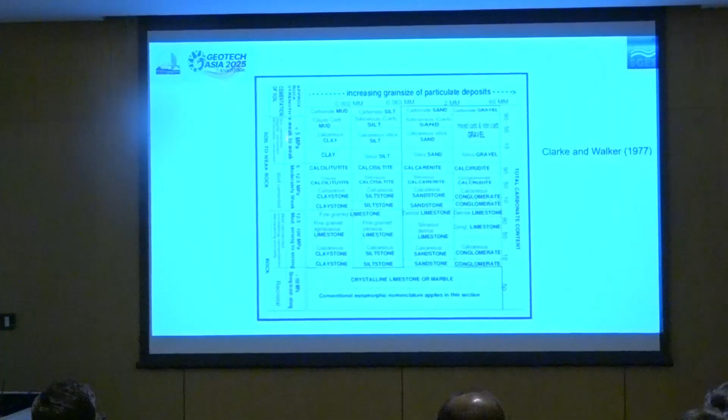The framework for classifying carbonate soils is Clarke and Walker, a Geotechnique publication. You could see the cemented material, uncemented material, and cementation. I draw your attention to this to classify carbonate sand. A carbonate content more than 90% is treated as carbonate sand, and less than 10% is treated as silica, and anything in between is calcareous, and you'll have to do an interpretation of the parameters.

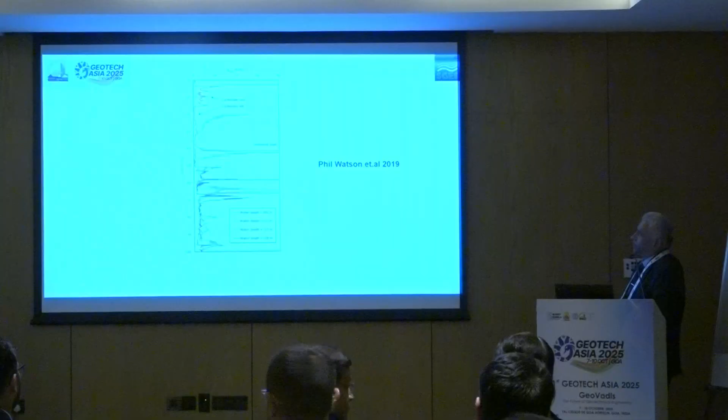So I pulled this from Phil Watson, who is the chair of TC209 offshore. He presented in one of his papers, and look at the CPT data. You have the refusal cone resistance, and you have the carbonate sand and carbonate silt, cemented layers, and with different water depths in the same region, the data appears not to superimpose on each other, which tells us about the heterogeneity of the material itself.

So Argema-Clarom, the Clarom publications, brought out some guidelines on how to characterize the carbonate materials. Before I talk about it, it reminds me to recall the literature where the problem existed in the early 80s on the North Rankin A platform in Australia. The Woodside engineers were monitoring the driving of piles, 2 meter diameter, 125 meters below the seabed. They found that the driving resistance was very low and the unit skin friction was not going to be achieved for the intended capacity.

So then they commissioned a research group under the guidance of engineer Graham Prince, with a Commonwealth Scientific Industrial Research Program. They studied the micro behavior, mechanical behavior, and then formed the guidelines. There were several conferences, at least two, one in Australia in the late 80s and one in Bahrain in 1999. And then this industrial research program, Argema-Clarom, published guidelines on how to handle and characterize carbonate materials.

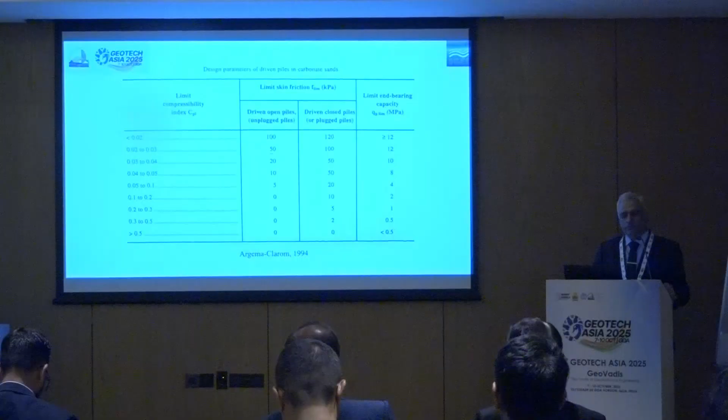This also leads to how to choose the limiting skin friction and the limiting end bearing, and you can see here 10 to 20 kilopascals and 2 to 4 megapascals on the skin friction and end bearing respectively. Here is the limit compressibility index, which is the slope of the tangent at 800 kilopascal. Some researchers, for example Professor Randolph, have said you could also use much higher pressures, not just 800, if there are any cemented materials.

This reminds me of a case study which shows a 20 kilopascal shear strength, from offshore west coast India. ONGC did this work, and the limiting end bearing is also 2 to 4 megapascals. It's a similar framework to the previous slides, it is derived, and the material characterized is sand.

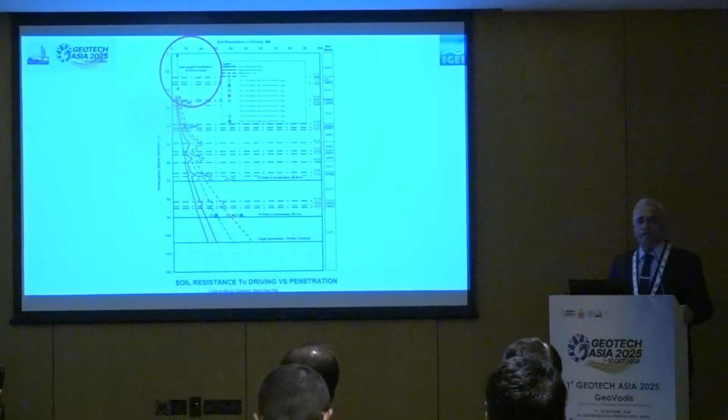With this low unit skin friction, you develop the capacities, and obviously it's very low capacity. You evaluate the initial self-weight penetration of the pile foundation. With no resistance, you'd expect about 15 to 20 meters of self-weight penetration, and then you develop the soil resistance to driving and blow counts in the wave equation program, choosing a 900 kilojoule hammer necessary to drive the piles to 90 meters deep.

However, the self-weight penetration was expected to be around 15 to 24 meters. The piling contractor was very careful, expecting very deep self-weight penetration, and wanted to put some pile stoppers or retainers so they don't sacrifice the piles in case of uncertainty and piles being lost. But when actual driving began, the pile did not experience any settlement.

It was only about 1 meter of penetration. You have a high blow count at the surface, and this actually panicked everybody offshore because it's very expensive. The barge time is consuming, and they didn't know what to do.

So what happened here, when the pile did not experience settlement, there was 15 meters of pile length sticking up. When you put the hammer, even with the maximum boom, you were not able to place the hammer on top of the pile. So they were not able to drive unless they put a small hammer. One of the piles, they had to chop it, drive it, and then weld it again.

It consumed barge time. So we went back and looked at this, connecting the 20 kilopascal with the cemented nature of the carbonate content, resulting in only 1 meter of self-weight penetration. When you look at the CPT, it gives 35 megapascal of cone resistance, a refusal stratum. Apparently, when you don't use proper tools and rigs, you're not able to quantify what the material really is.

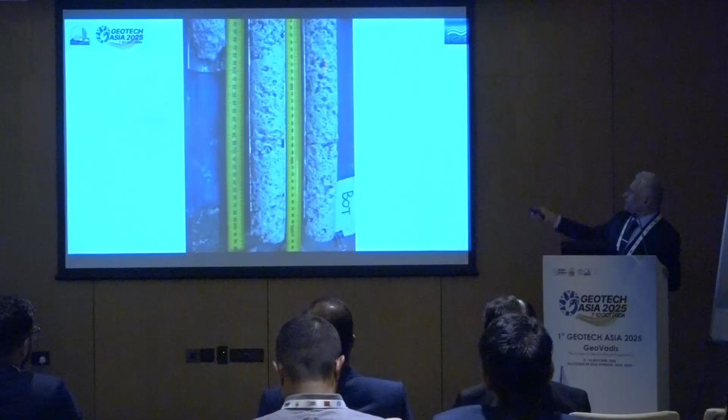It is housed in the magazine, and after certain progress, they bring the tool out on the deck and recover the samples, and then characterize those materials. Because of the topic, I pulled out these old photos from those days, and you see the uncemented material here, and also the cemented materials that you encounter in the borehole. These kinds of materials are so fragile that if you don't use triple tube core barrels, you will not be able to get these kind of core samples. We face the same problem in our onshore geotechnical investigation in characterizing the overburden and the material between overburden and the bedrock. So one of the ways to characterize this carbonate material.

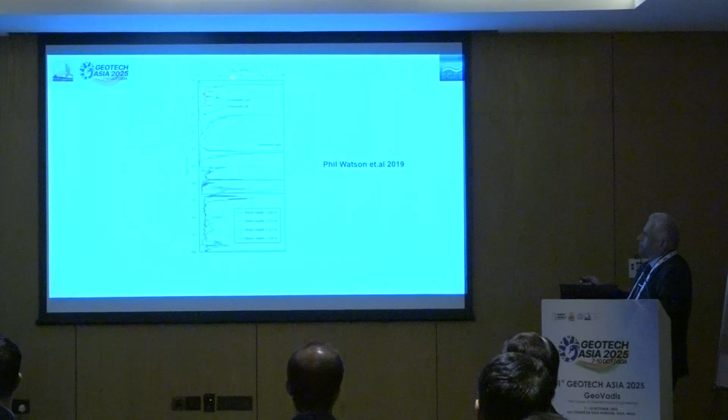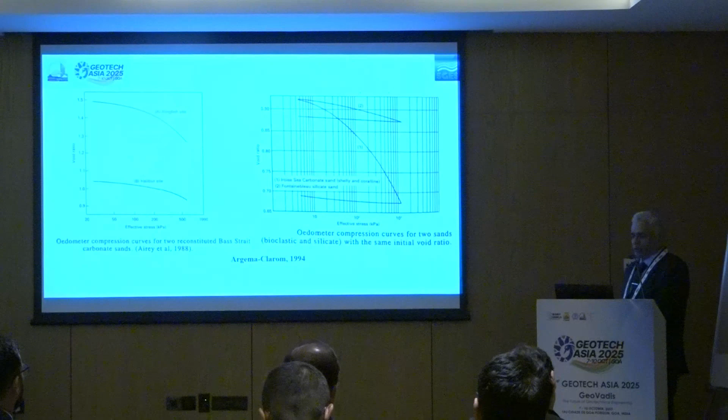I pulled this out from Phil Watson, who is the chair of TC209 offshore. He presented in one of his papers, look at the CPT data. You have refusal to cone resistance, and you have carbonate sand and carbonate silt, cemented layers, and with different water depths in the same region, the data appears not to superimpose on each other, which tells us about the heterogeneity of the material itself. Since this undergoes large compression, you see the volume change for this bioclastic or biogenic material. High void ratio changes, where at similar relative density, the silicate materials don't undergo much compression.

Argema-Clarom, the Clarom publications, brought out some guidelines on how to characterize carbonate materials. Before I talk about it, this reminds me of the literature where the problem existed in the early 80s on the North Rankin A platform in Australia.

The Woodside engineers were monitoring the driving of piles, 2 meter diameter, 125 meters below the seabed. They found that the driving resistance was very low, and the unit skin friction was not going to be achieved for the intended capacity. So they commissioned a research group under engineer Graham Prince with the Commonwealth Scientific Industrial Research Program, who studied the micro and mechanical behavior and formed the guidelines.

There are several conferences, at least two: one in Australia in the late 80s and one in Bahrain in 1999. This industrial research program, Argema-Clarom, has published guidelines on how to handle and characterize carbonates. One such characterization requirement is to perform a compression test, the oedometer test.

Either you can do an isotropic compression in triaxial or perform an oedometer test and develop this tangent. The slope of this at 800 kilopascal is defined as the limit compressibility index. Some researchers have also shown the secant compressibility index, but the tangent limit compressibility index at 800 kilopascal is very well received in the industry and still is being practiced.

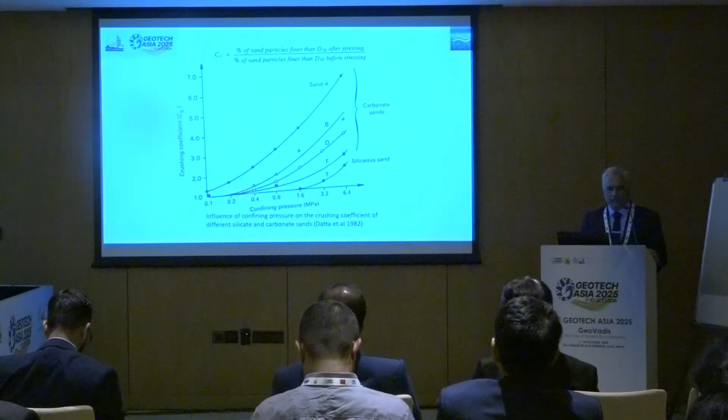Some researchers have also shown the crushing coefficient. If you perform a grain size distribution before and after the test, you see no change in silicate material, but you see particle crushing in the carbonate phenomenon, and this crushability index is defined here. If you encounter a crushing coefficient, that means the materials are becoming finer, and you'll have to be careful in using them for design.

This also led to how to choose the limiting skin friction and limiting end bearing: 10 to 20 kilopascals and 2 to 4 megapascals for skin friction and end bearing respectively. Here is the limit compressibility index, the slope of the tangent at 800 kilopascal. Some researchers, for example Professor Randolph, have said you could use much higher pressures than 800 if there are cemented materials.

This reminds me of a case study showing 20 kilopascal shear strength, from offshore west coast India. ONGC did this work, and the limiting end bearing is also 2 to 4 megapascals. It's a similar framework to the previous slides, and the material characterized is sand.

With these low unit skin frictions, you develop the capacities, which are obviously very low. You tend to evaluate the initial self-weight penetration of the pile foundation. With no resistance, you'd expect about 15 to 20 meters of self-weight penetration.

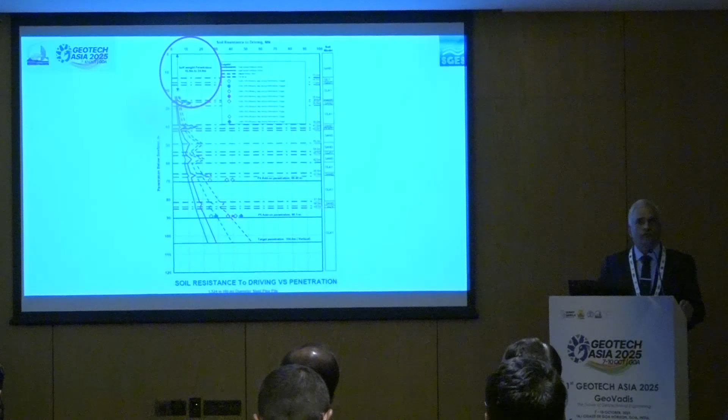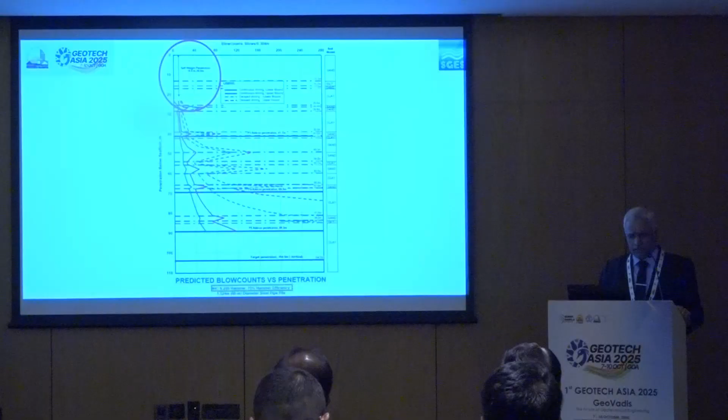You then develop the soil resistance to driving and the blow counts in the wave equation program, choosing a 900 kilojoule hammer to drive the piles to 90 meters deep. However, the self-weight penetration is expected to be around 15 to 24 meters. With this, the piling contractor was very careful, expecting deep self-weight penetration, and wanted to put pile stoppers or retainers so they wouldn't sacrifice the piles in case the uncertainty led to piles being lost.

But when actual driving began, the pile did not experience any settlement — only about 1 meter. You have a high blow count at the surface, and this panicked everybody offshore because it's very expensive, the barge time is consuming, and they didn't know what to do. So what happened here when the pile did not experience settlement?

There was 15 meters of pile length sticking up. When you put the hammer on, even with the maximum boom, you are not able to place the hammer on top of the pile. So they were not able to drive unless they used a small hammer. One of the piles they had to chop, drive, and then weld back together.

It consumed barge time. So we went back and looked — I'm connecting this 20 kilopascal with the cemented nature of the carbonate content, resulting in only 1 meter of self-weight penetration. When you look at the CPT, it gives 35 megapascals of cone resistance, a refusal stratum.

Apparently, when you don't use proper tools and rigs, you are not able to quantify what the material is. In this case, there was no drilling or triple tube core barrel used, and therefore they characterized the material as sand. A conservative estimate for pile capacity is fine, but that doesn't suit the drivability and initial self-weight penetration assessment. This is simple, but it's one of the very important lessons we learned in the offshore project.

I had an opportunity and was honored to work on a project about 20 years back in Australia, using the portable remote operated drill operated by Benthic Geotech in Australia. It has 2 magazines where all the drill rods, the CPT cones, and the core barrels are housed. The entire unit is placed on the seabed, and the driller operates it by computer, collecting samples, pushing the CPT cones, collecting core samples using triple tube, but you cannot take out the material. It is housed in the magazine, and after certain progress, they bring the tool out on the deck and recover the samples, then characterize those materials.

Because of the topic, I pulled out these old photos from those days, and you see the uncemented material here, and also the cemented materials that you encounter in the borehole. For these kinds of materials, which are so fragile, if you don't use triple tube core barrels, you will not be able to get these kinds of core samples.

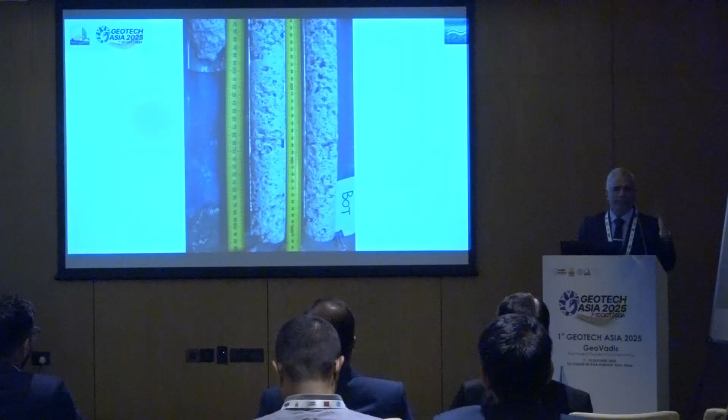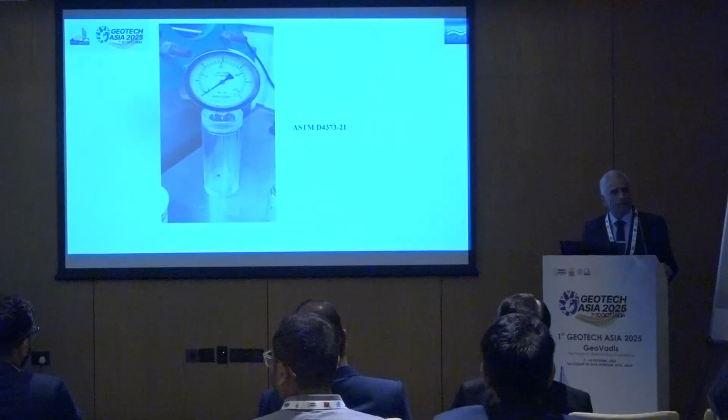We face the same problem in our onshore geotechnical investigation in characterizing the overburden and the material between overburden and the bedrock. So one of the ways to characterize these carbonate materials is to qualitatively test with 1 normal hydrochloric acid, whether it reacts extremely high, moderate, or not at all. The moment you see some reaction, you subject these materials to further carbonate content testing as per ASTM standards, and this carbonate content will dictate what kind of parameters to be chosen for your pile designs.

Again, I prepared this 20 years back in 2006, and you could see the cone resistance. You have a high CPT cone resistance, and it refused at 10 meters. These are all uncemented material in the top 10 meters, then suddenly you see a cemented material, well cemented.

This is for an anchor project, and you could see there's only 4 data sets. I put about 11 or 12 in that region, circular locations. None of them superimpose on each other, clearly showing the heterogeneity of these carbonate materials vertically as well as laterally.

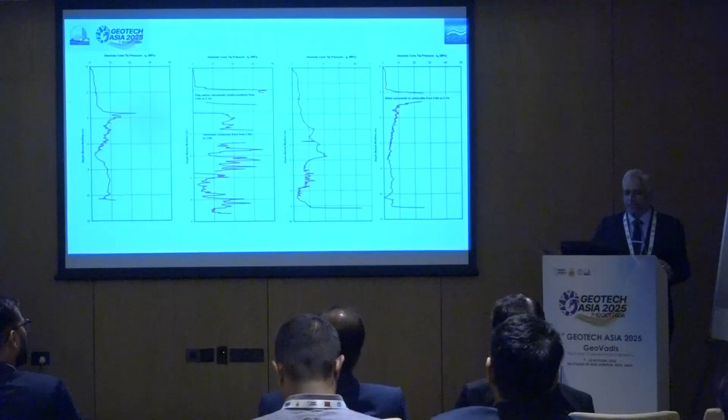You see the uncemented material and the cemented material. The strength at 10 meters was about 14 megapascals, while at 15 meters it was only around 2 megapascals of unconfined compressive strength. So the particle

curve itself is moving towards becoming finer. This is one of the important characterizations we have to do, the grain size distribution before testing and after testing, be it a direct shear test, a consolidation test, an oedometer test, or so on.

I just illustrate quickly two case studies, one on the cemented layer, the other one on the uncemented materials. How do we handle the carbonate nature?

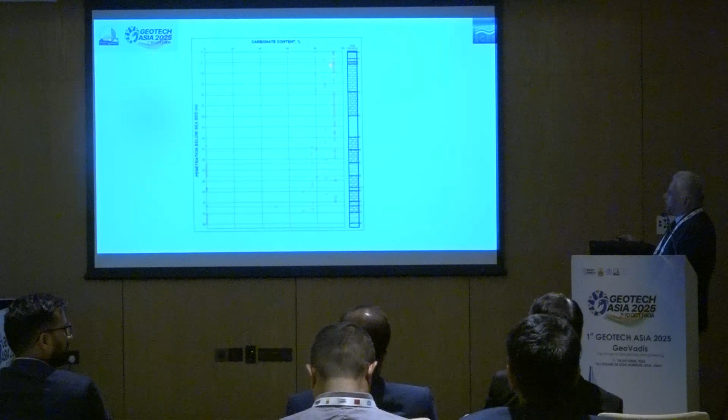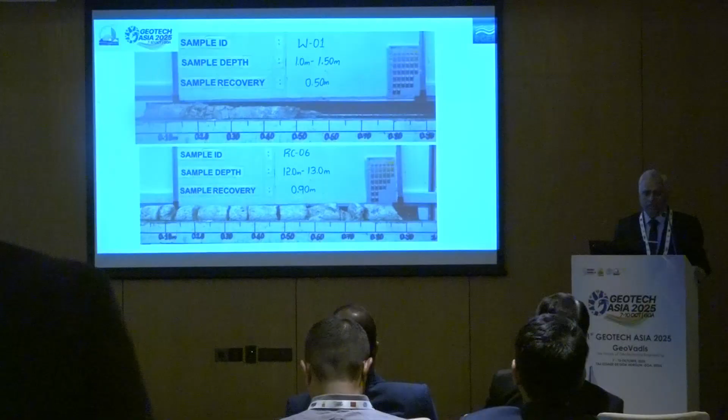In this case, it's very prominent in offshore Abu Dhabi. You can see the carbonate content is in excess of about 90%, and the material, I could see from the legend, is predominantly cemented. Only at the surface is there uncemented material, while at deeper depths predominantly you have cemented layers. The unconfined compressive strength varied between 1 to 4 megapascals.

So with this kind of predominantly cemented layer, driven piles are not conducive, so you have to resort to drilled and grouted piles. What is normally done is they drive a casing until reaching a competent material, so that during drilling there is no borehole collapse. Once you drive that, you make a hole, then insert the pipe and grout it.

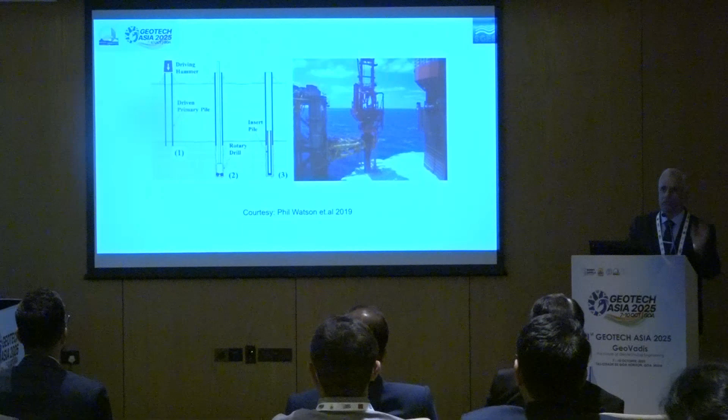So the capacity is dictated by the interface between the pile, the grout, and the rock. These piles will have shear keys at a certain spacing and thickness, and therefore the capacity is dictated by the unit skin friction based on the unconfined compressive strength, and also the pile-to-grout interface. You have the grout strength, generally about 35 megapascals, used in this region. Then you estimate the ground model from these previous slides, estimate of friction, and then the capacities.

Okay, so you have to drill this. Usually in this drilled and grouted pile, you will not consider the end bearing component, only the friction component. So what if you don't have a cemented layer?

Again, in Saudi Arabia, you can see the carbonate content in excess of 80%. At certain depths, it's between 60 to 70%. So anything more than 80%, you treat this as a carbonate soil. Less than 20%, you treat as a silicate material.

Anything between 20 to 80%, you just have to do some interpretation. So here they do a logarithmic interpolation to get this unit skin friction and end bearing. Wherever it's more than 80%, you limit the skin friction to 20 kilopascal and 3 megapascal on the end bearing, and otherwise you interpret between 20 to 80%. So you develop this capacity, and I want to illustrate here.

If you don't consider the carbonate content, you are actually over-predicting the pile capacity. If you consider the carbonate content, you will have the realistic value. And we have seen losing pile and losing hammer and so on and so forth.

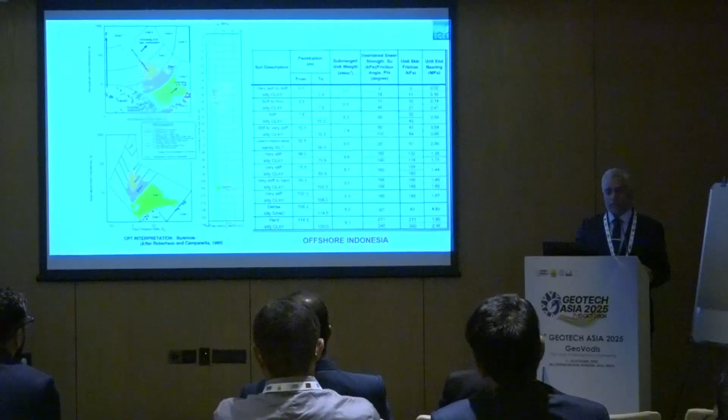With these two illustrations, I want to highlight that in the regions I have worked, you could see a normally consolidated profile with all cohesive soils. In the east coast of India it's an under-consolidated material with OCR less than 0.5. If you go to the Middle East, the minimum shear strength is around 300 kilopascal. Sometimes you get cemented layers; non-carbonate we term as gypsum, and in the carbonate region it's calcarenite, calcilutite, etc. as per the Clarke and Walker table.

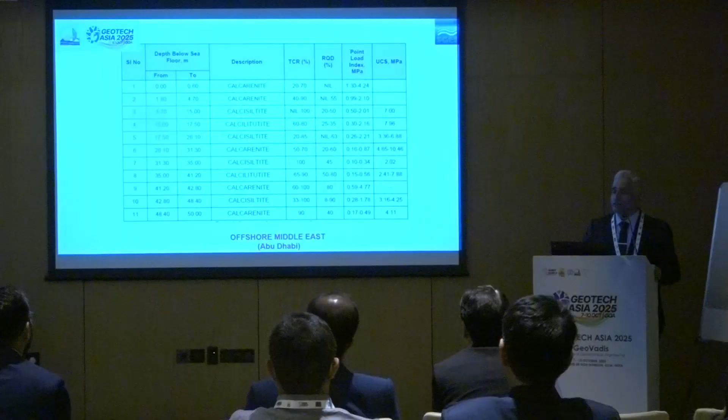So in order to bring a different perspective on stratigraphy and the response of these materials, and the risk that this stratigraphy offers to the installation of offshore oil and gas structures, I have written this book, compiling my experience and the company's experience across all these 5 geographies. It was inaugurated a couple of months back, and I'm happy to share that this book is now published and available across the world on Amazon.

I'm equally delighted that I was able to present this book to my research supervisor, Professor K.S. Subbarao. With this, I conclude. Thank you, Chairman, for this. I acknowledge all these people, and thank all of you for your patient listening. Thank you.

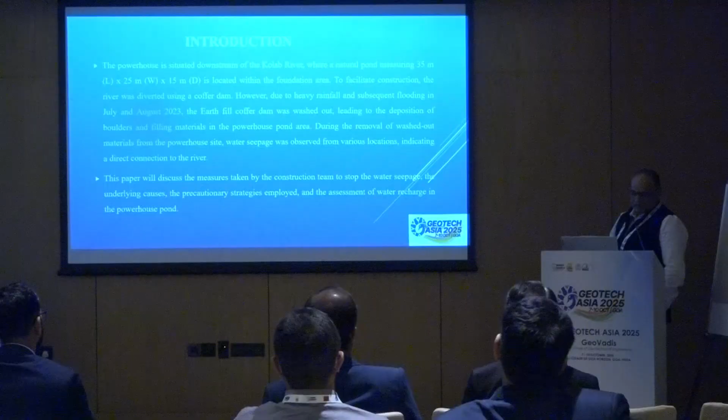In the powerhouse area, the consultant selected the site because it was a deep gorge, meaning the river was already taking a turn at that point, and had naturally formed one big pond that is 35 meters long, 25 meters wide, and 15 meters deep.

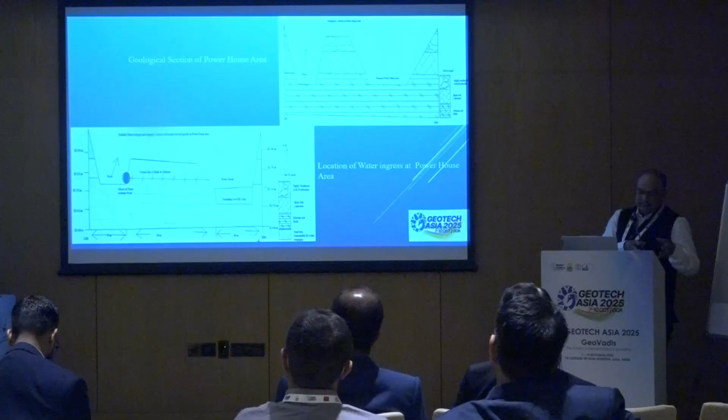We took some measuring data by putting chemicals and color in the river body, and determined where the water is coming from at the powerhouse area.

Before starting the grouting work, the cement grouting work, we observed the Lugeon value which was very high, about 175. Based on technical suggestions, we started the grouting, but it was very difficult to control the water because water seepage was about 20,000 liters per hour.

Initially we were unable to put even one bag of cement at 5 to 6 bar pressure itself. Then we increased the pressure and increased the hardness also.

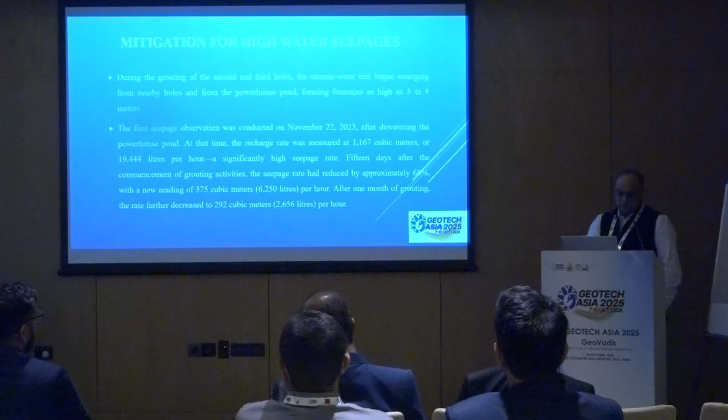Finally we controlled the water seepage down to about 2,000 liters per hour. But this work went on for about 7 to 8 months to control this water seepage.

We controlled the water seepage, but at the downstream area there was filled-up material, and the client was in a hurry to start the construction work, so his consultant suggested doing sheet piling in that area.

The client deputed another contractor, and they did the sheet piling. Due to the sheet piling, high vibration, and related factors, all the grouting work was damaged, and because of this, the client again shifted the powerhouse location to the downstream area.

This was the conclusion, sir.

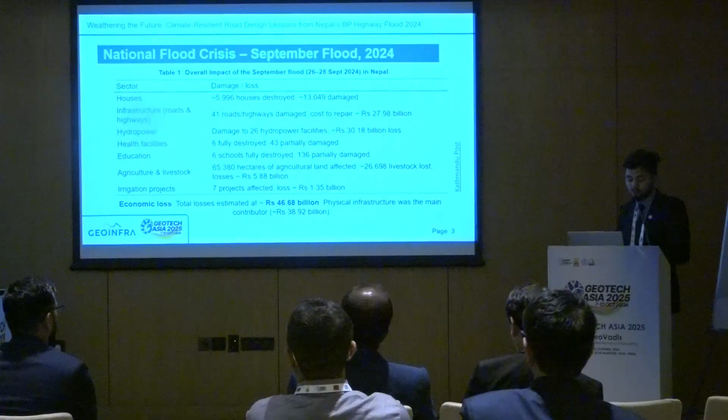This is a strategic link between Kathmandu Valley, the capital city of Nepal, and the eastern Tarai region of the country, spanning 160 kilometers. It traverses fragile schistose and phyllitic formations with around 114 bridges.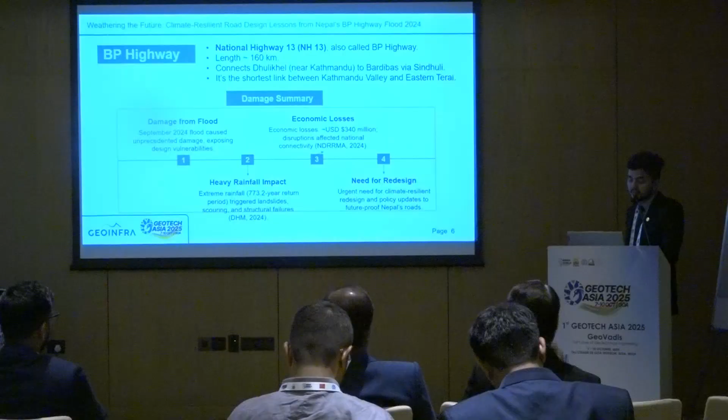During the 2024 event, extreme rainfall caused landslides, abutment scouring, and roadway collapse. This is the summary; I will go deeper.

This was the methodology: we did a reconnaissance survey, some drone photographic surveys, and hydrological and meteorological analysis. After that, we dug up the probable causes and the impacts of the damage.

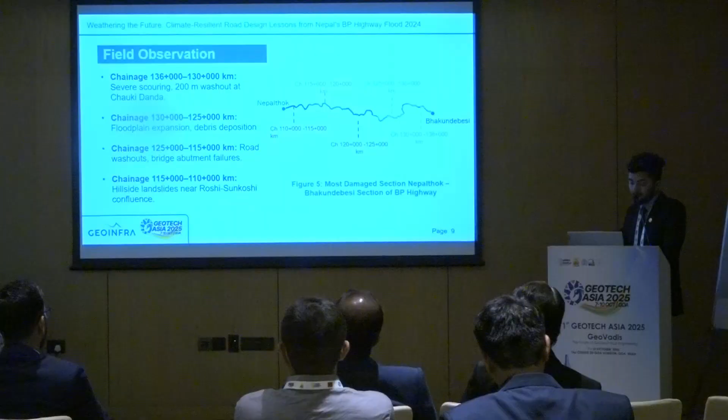So this is the study area map. You can see the most affected section of the highway, a 26-kilometer study segment. I have shown some of the chainages where most of the damage occurred. Between kilometers 136 to 130, there was severe scouring with a 200-meter washout near Chauki Danda, and some debris deposition areas, floodplain aggradation, breaches and road washouts like that.

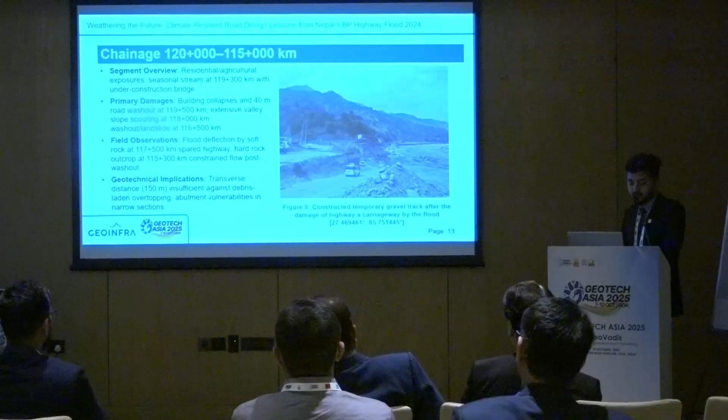This is another section with damages. I don't want to go deep here. So talking about the event, we did some hydroclimatic analysis.

Using Thiessen polygon interpolation, we quantified the spatial heterogeneity and performed a Gumbel EV1 analysis, which yielded a 773-year return period for this rainfall magnitude.

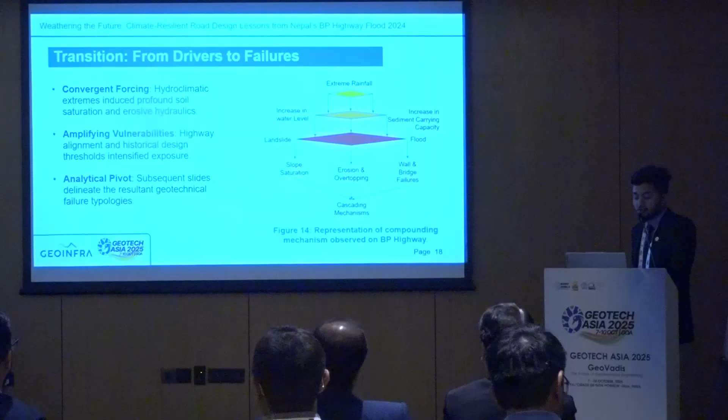This hydroclimatic geomorphic process interacted in sequence. Extreme rainfall saturated slopes, triggering landslides, entrained debris, enhanced scour and overtopping, which in turn undermined structural elements.

Damage type one was slope saturation and landslides that happened in most sections. Another was erosion and overtopping phenomena, as you can see in the pictures. Another was wall and bridge failures on the highway section. And there were cascading mechanisms as well: landslides, river erosion, and induced washouts, like that.

This is the damage mapping of the whole section, where convex meanders with sinuosity indices greater than 1.2 correspond to high risk zones.

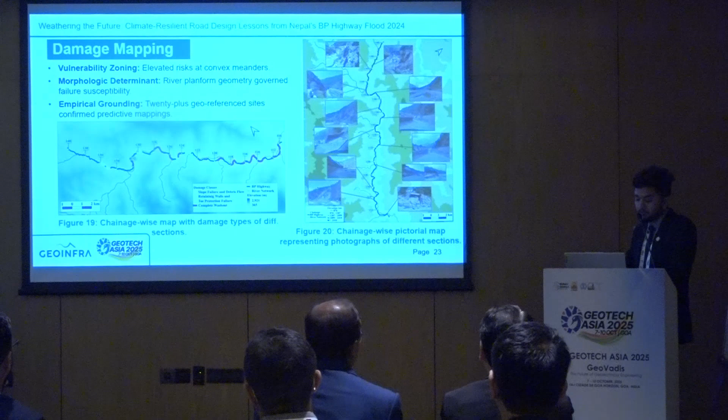Complete your presentation, time is over. I'm just concluding here, so translating findings into practice.

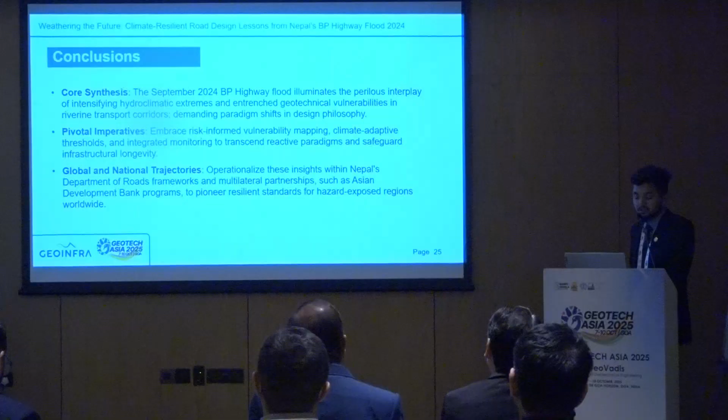And so the conclusion is like this: the BP Highway flood exemplifies the interplay of climate-driven hydrologic extremes with geotechnical fragility in Himalayan corridors. This demands a shift from deterministic to probabilistic design approaches for river corridor-based highways, embedding climatic projections, sediment dynamics, and geomorphic alignment optimization into road engineering.

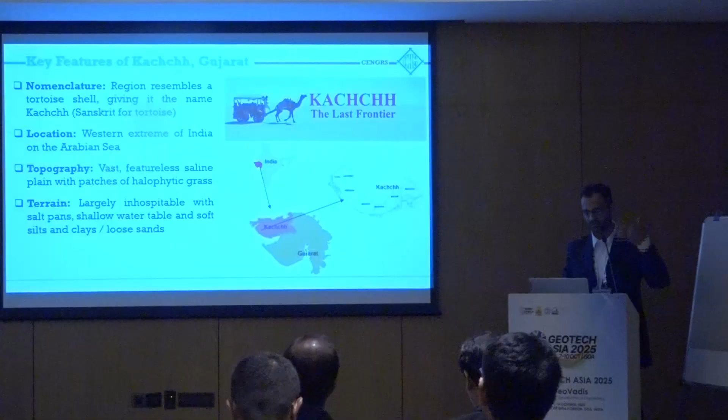It's actually no man's land. If you haven't been there, don't. There's nothing for miles across. If you just stand, you can see till the horizon. So it's a very tough site for us to work, to carry out investigations. This is beyond the BSF post, actually, near the border of Pakistan.

So this is a very simple presentation. We'll just share our experiences, or the results of the investigations we've carried out in this area. Again, since it's no man's land, there's very little past experience of investigating the strata here. So I think this project gave us an opportunity to really understand the geotechnical properties of the Kachchh area. So let's see what we did.

In the last 2 years, we've investigated more than 300 wind turbine generator, or WTG, foundation locations in this area. Usually these are quite far away from each other. At each WTG location, typically the customer-defined scope was to do one borehole, one cross-hole seismic test, and of course electrical resistivity test and field CBR. At a few locations, and very much on our insistence, we also carried out some CPTs.

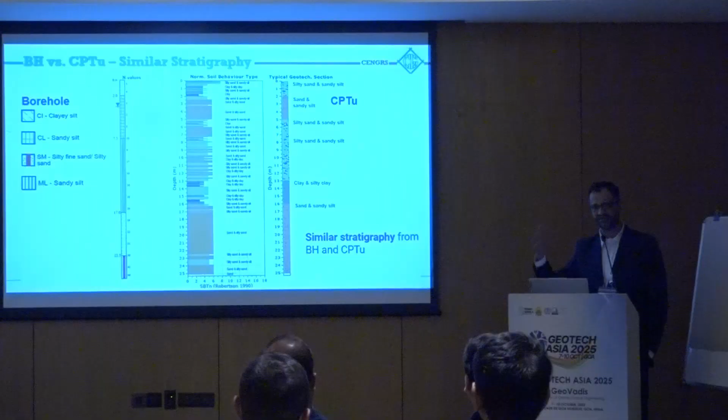So it's interesting, and I've picked one case study where we've carried out CPTs as well as boreholes, just to illustrate the findings. I was quite happy to find that the CPT-based soil behavior type actually matched what we get from boreholes quite well, even for these very typical kind of soil conditions. So the Robertson correlations were bang on, which is very encouraging.

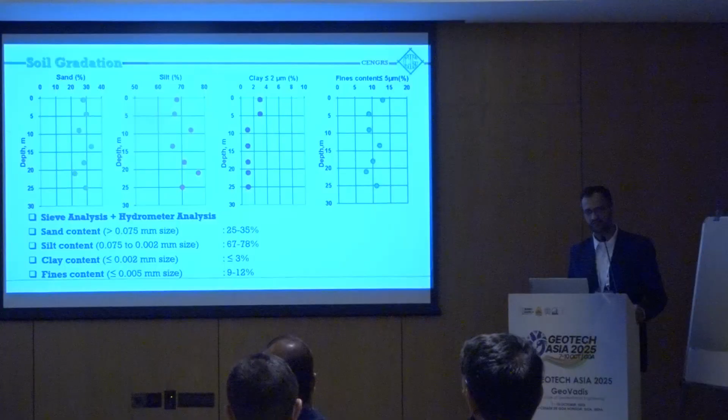This is what the stratigraphy basically is. It's 30-70, 30% sand, 70% silt. It's actually non-plastic silt. So that's what you get here. In terms of moisture content and liquid limit, the moisture content is almost close to the liquid limit. It makes it almost a perfect candidate for liquefaction, actually. It's highly liquefiable soils, as we will see.

The cross-hole seismic test results—and we've done so many of these. Again, we did 300 cross-holes, unfortunately without deviation survey. The customer did not take our opinion on this. But nevertheless, the cross-hole results show the shear wave velocities are extremely low, typically less than 200 meters per second, down to depth, and fairly consistent across the region as well.

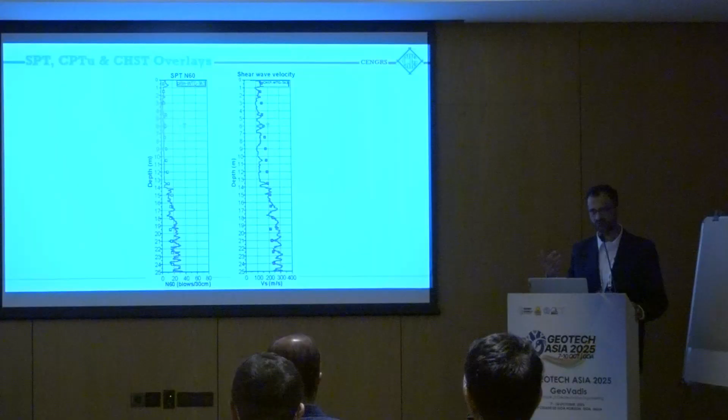The shear wave velocities also we compared. You know that the CPT values can be correlated to shear wave velocity, just like SPT. So we compared that correlation with the actual measured shear wave velocity profile from cross-hole, and we got a very good match. I was keen to do seismic CPTs, but the customer was not keen to pay us for it.

Which brings me to the next point, and this is not in the paper—I just wanted to discuss. We always believe that the key point in any investigation, any project, is not to copy-paste the investigation program, but to think about what are the geotechnical challenges and what's the best way forward, right? So unfortunately here the scope definition came in the form of a BOQ from the customer, and they were not open to change.

But really, this is what we pitched to them. We said, hey, this doesn't make sense in strata like this. In difficult terrain like this, it makes no sense to go and do so many boreholes, lab testing, and cross-hole testing. It's very painful, very time-consuming, very expensive. So we made a pitch that, for 263 WTG locations, rather than doing borehole-based investigations, we could have just as easily done CPT-based investigations. And we did the math, and we showed them that an investigation program of 191 days can be completed in 38 days, apple to apple, at a lower cost, and you get much more reliable data.

So if I was a decision maker, I would have jumped at this, but this didn't fly, right? But now we are doing another project, incidentally, in Kachchh, which is a complete CPT-based investigation program with seismic CPTs and CPT samples, and it's working quite well.

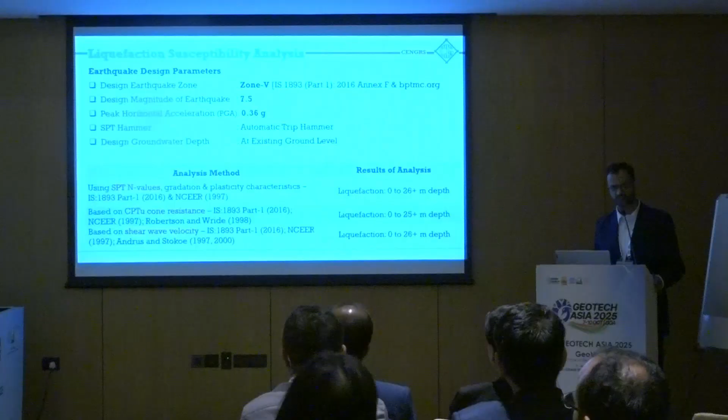I want to quickly touch on the liquefaction analysis. So we checked this out, and this is obviously zone 5, 7.5, 0.36 PGA area as per the Indian code. We ran the liquefaction analysis based on SPT, CPT, as well as shear wave velocity, just to see what we get.

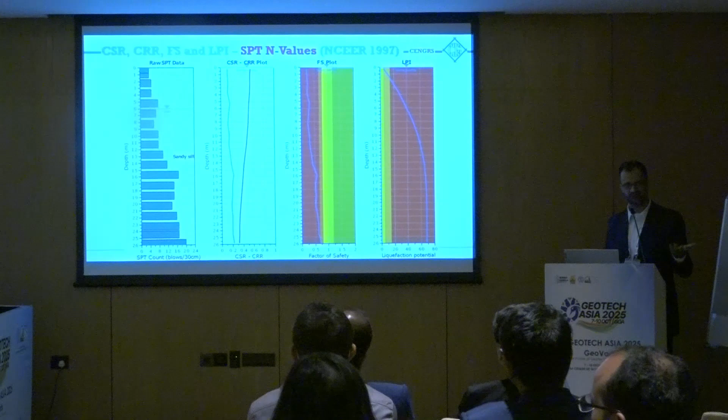So this is what we got from SPT. Pretty much everything down to 25 meters was investigated. Factor of safety was less than 1. Everything liquefied. We got the same story from shear wave velocity as well, and of course, the same story from CPT as well.

The fun part was putting it all together, right? I've been running these liquefaction analyses for a few years now, and to be honest, the CRR values never matched for me. I don't know what your experience is, but for me they usually haven't matched. Here, I was pleasantly surprised to find that the CRR profiles from all three approaches matched bang on. This is very surprising, but also very heartening.

It gave us a lot of confidence in all three approaches and in our final results as well. Of course, we converted this to LPI, and naturally the liquefaction potential index of these soils is extremely high. The liquefaction is not limited to 25 meters - it's likely going much deeper. We only investigated 25 meters, right?

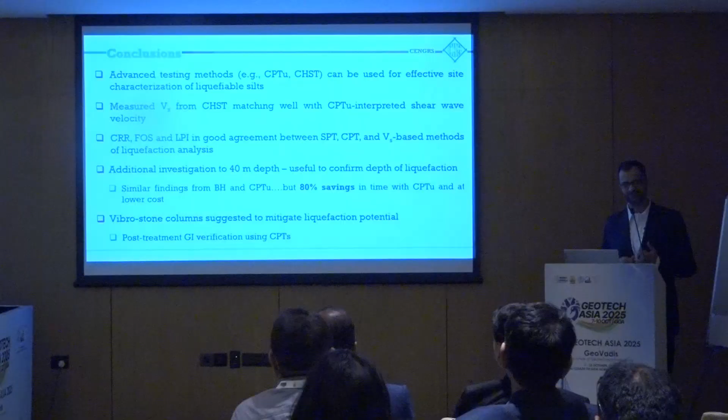So I want to bring us to conclusions. Obviously, we always push for advanced testing methods as an organization, and in the industry. We also push for customized investigation programs, not copy-paste BOQs. I think it really makes a lot of difference.

We saw how different approaches kind of matched each other. The SPT values, N60 values talk to each other, the stratigraphy, the shear wave velocities, the liquefaction analysis - everything kind of matched quite well for these soils.

We did recommend that additional investigation should be carried out to deeper depths. It didn't fly. We did recommend that we go for better testing. Didn't fly. In the end, the customer decided to go for vibro stone columns, which are currently being installed all across. Again, we did push and recommend doing before and after CPTs - that's the other way CPTs would have been very useful. If you had the data, it could have also been QA/QC for the ground improvement program, but that didn't fly either.

So with that, I end my presentation. Thank you. I'll take questions.

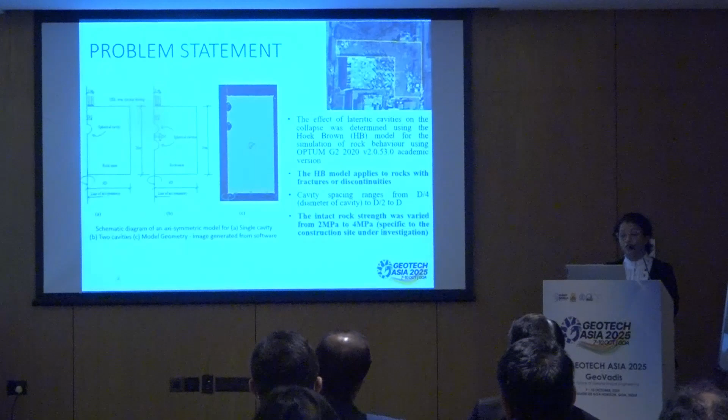Effect of lateritic cavities on collapse load were determined using Hoek-Brown criteria. The Hoek-Brown model was used because it is the most suitable model for discontinuous or fractured rock. The cavity spacing, when there were multiple cavities in the same vertical plane, was varied from d/4 to d/2 to d.

Intact rock strength was varied from 2 MPa, then 3 MPa and 4 MPa. Why so much? Because we were informed that expected strength would be 4 MPa, but there was nothing mentioned in the geotechnical report, so we went down to 2 MPa to do the analysis.

The input parameters used were: unit weight was taken as 22 kilonewton per cubic meter, saturated unit weight was taken as 24, the petrographic constant was taken as 5, and geological strength index was taken as 35.

Now, why these values? From the published literature, the expected range of the petrographic constant, mi, is 5 to 15. And for geological strength index, it goes from 35 to 75. To keep it conservative, I have taken the lower values.

The cavity diameter was taken as 2 meters. Cover depth was taken from 1 meter to 4 meters. Now, all these input parameters do conform with the published literature, which gives the properties of the laterites, the global properties.

Now, analysis: finite element limit analysis was performed on this particular model. Axisymmetric loading conditions were created. Adaptive meshing was used, and a multiplier distributed load with an initial value of 10 kilonewton per square meter was used. The model width was taken as 4 times the cavity diameter.

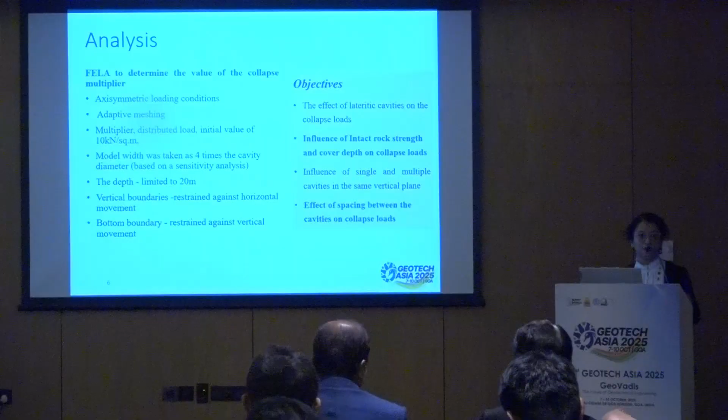Why so? Although this is not published in this particular paper, a sensitivity analysis was performed to decide what the depth and length should be. It was noticed that from the point of view of accuracy and saving time, 4 times diameter was sufficient. The depth was limited to 20 meters.

Why 20 meters? Because homogeneity is assumed. If I go too deep, that particular assumption doesn't hold good. Vertical boundaries were restrained against horizontal movement, and bottom boundaries were restrained against vertical movement.

Now the objectives: what are the outcomes of this analysis? The first objective was to determine the effect of lateritic cavities on collapse loads. Influence of intact rock strength and cover depth on the collapse load was also determined. Influence of single and multiple cavities in the same vertical plane was determined, and the effect of spacing between the cavities on the collapse load was also found out.

This is the first result. In the graph, there are blue, red and black lines, each corresponding to sigma ci, the intact rock strength of 2 MPa, 3 MPa and 4 MPa respectively. As expected, the lower the intact strength, the lower the collapse load expected. On the vertical axis is mentioned the collapse multiplier.

This collapse multiplier is a factor that is multiplied to the initial load. I told you the initial load taken is 10 kilonewton per meter square. So if the collapse multiplier I'm getting is 10, then my collapse load will be 10 into 10. This multiplier is plotted against the cover depth.

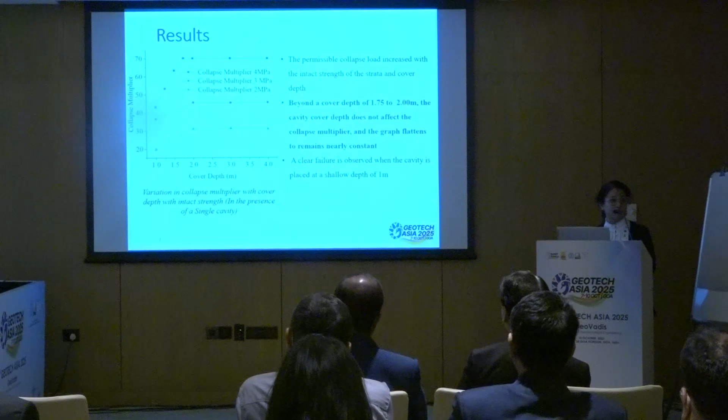From this plot, it is very clear that for lesser cover depths of 1 meter, the expected collapse loads are very, very less, and they go on increasing as the cover depth increases. That is something that is expected: the deeper the cavity goes, the higher the collapse load expected.

But then till how much? If the cavity goes deeper than 2 meters, that gain is not much. So the collapse load keeps increasing till 1.75 and 2 meters; beyond 2 meters, the curves are flattening.

One minute. Yes, you need to complete one minute. In one minute? Okay.

So the next result, this particular slide is talking about single cavity and double cavities. Now again, these are clusters. The red line that you can see, these are 2 lines. The lower ones are for 2 MPa, the middle one is 3 MPa, and the top 2 are for 4 MPa. This is happening, you can see for 2 MPa and 3 MPa the lines are overlapping. It means, irrespective of whether there is a single cavity or double cavity, it's not having any much effect on the collapse load. That means for the lower strengths, the collapse loads are not changing even if there are multiple cavities in the same plane.

Whereas for the higher strength, 4 MPa, there is a change in the collapse load. Obviously, when there are multiple cavities in a 4 MPa rock, it is showing a decrease in the anticipated collapse load. How much decrease? Around 15% decrease is shown in the 4 MPa rock.

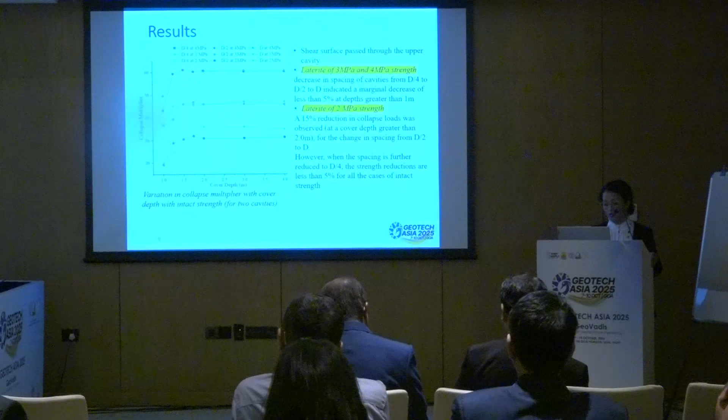Conclusions are laterite cavities can reduce values of permissible load. Laterite strata with 1 or 2 cavities in the same vertical plane are investigated to determine the effect of multiplier. Reduction in the collapse load will be anticipated for higher sigma Ci and for larger cover depths. Reductions in collapse load due to reduction in intact strength can also be alarming.

Change in the sigma Ci from 4 to 3 MPa showed a decrease of 15 to 35%, while the change from 3 MPa to 2 MPa showed a decrease from 30 to 50% with depth. Variation in sigma Ci suggested need for higher reliability in the prediction of intact strength. The study also suggested that as cover depth increased, there would be a noticeable strength gain. However, cover depth for more than 2 meters does not end up in any strength gain because the curve flattens. The presence of multiple cavities is affected only for 4 MPa rocks, mainly at a depth greater than 2 meters.

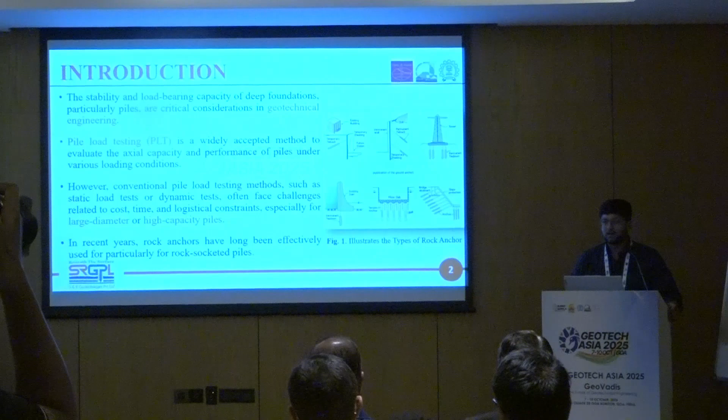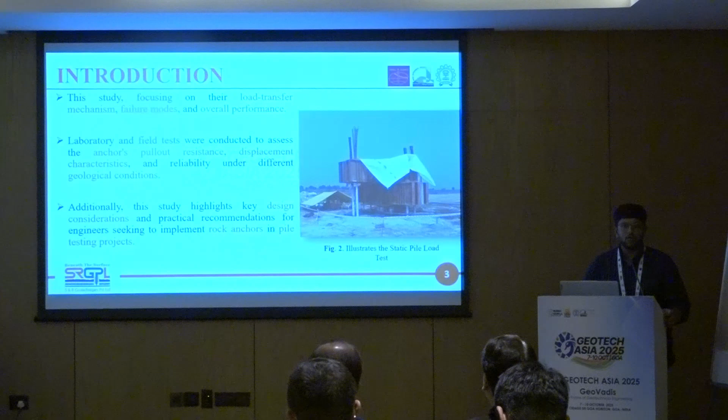So this study is focusing on the load transfer mechanism, failure modes, and overall performance. The laboratory and field tests were conducted to assess the anchor's pull-out resistance, displacement characteristics, and reliability under different geological conditions. The study highlights key design considerations and practical recommendations for engineers seeking to implement rock anchors in pile testing projects.

So the components and failure modes of rock anchors, as mentioned, the pre-stressed grouted ground anchors act as a tension resisting structural member that is installed and bonded with the soil or rock to transfer the tensile load into the ground. This is commonly referred to, as per IS 10270:1982, and the bonded length is considered based on the piles nearby boreholes and UCS value of the rock, so we can base the design on that.

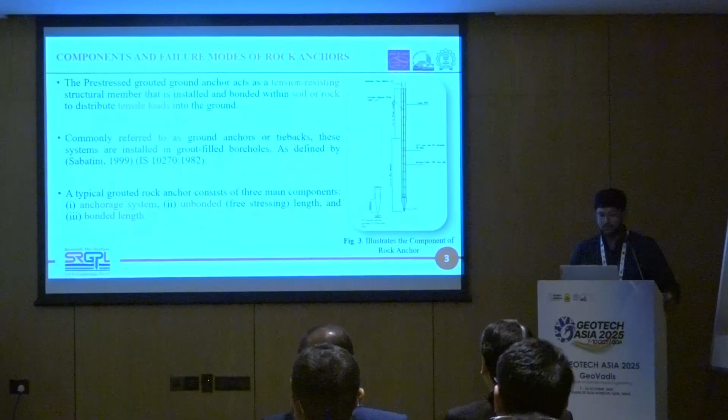So typically, grouted rock anchors consist of three main components, like the anchorage system, the free length, and the fixed length.

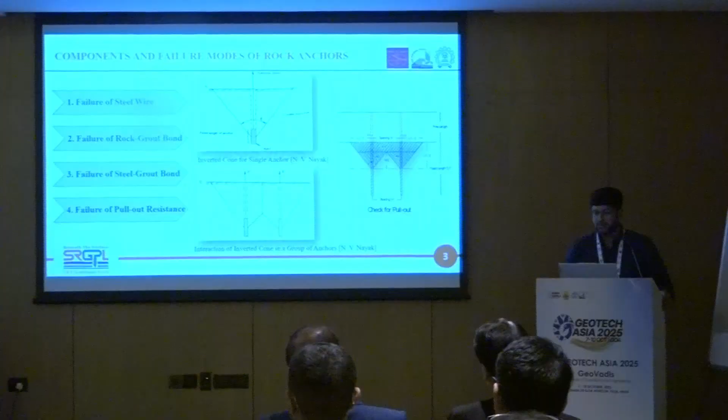And the failure modes of the rock anchors, like failure of steel wires. So to prevent steel wire ruptures in pre-stressed anchors, a sufficient number of strands must be provided. The conservation factors we provide for the design load determine the number of strands. For the rock-grout bond, that is to prevent failure between the rock and grout, so a sufficient fixed anchor length must be extended into the

competent strata. The design bond stress at the rock-grout interface is based on IS 10270. And for the failure of the steel-grout bond, the design bond stress between the steel and grout is as per IS 456.

And for the pull-out resistance, we can refer to the complete extraction of anchor from the ground. It is governed by the weight and self-weight of the rock, so the overburden must exceed the anchor capacity with a suitable factor of safety.

So for the installation methods for rock anchors, there is the drilling method, high tensile strand materials, grouting preparation, and stressing of rock anchors. The stressing is carried out by single or multiple pull stressing jacks. The strands are locked initially with 5 to 10% of the capacity to remove twisted strands.

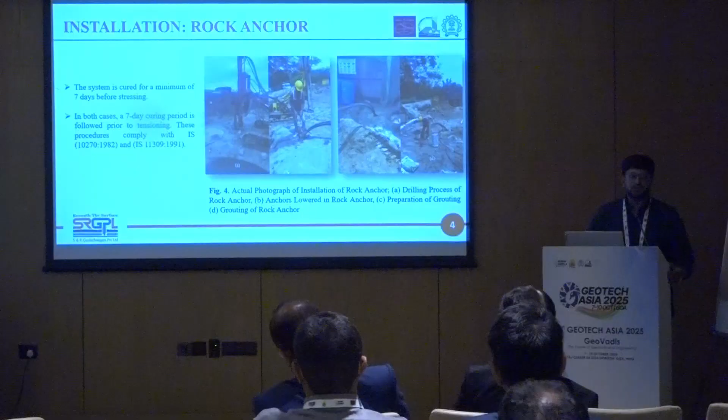And for the experimental results and experiences for the rock anchor, actually this is a working pile with a diameter of 1.5 meters, and the design capacity is 2160 metric tons, with a test load of 3240 metric tons, and there is a reaction load of 405 metric tons for the highest test load we have done. And the anchor used for this, total length is 42 meters.

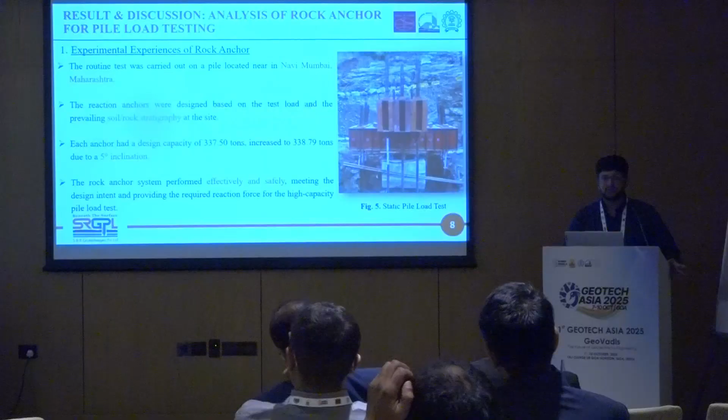With 27.5 meters as the free length exceeding as per IS 10270, and the fixed length is 14.50 meters. This test was carried out in Navi Mumbai, Maharashtra, and the reaction anchor was designed based on the test load and the prevailing soil stratigraphy.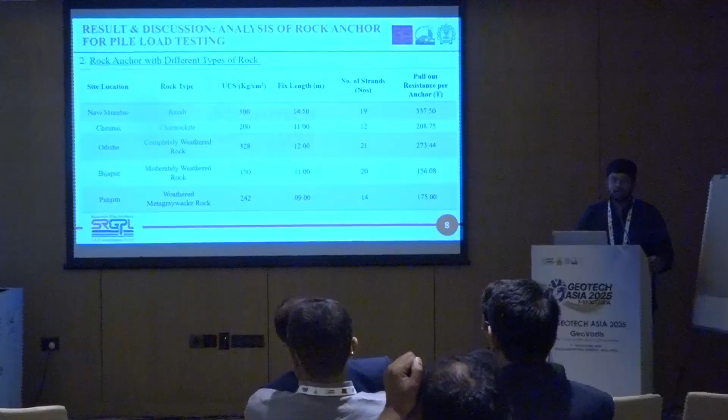So the rock anchor with different types of rocks - we have collected data from overall pan India for different rock types, like Navi Mumbai, Chennai, Odisha, Karnataka, Goa, with respect to different UCS types, and determined the number of strands and particularly the pull-out resistance for each rock anchor.

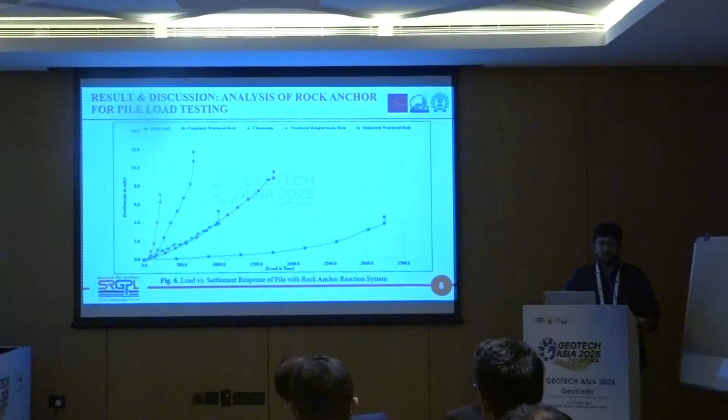From that, there is a graph between load versus settlement for pile with rock anchor systems. The figure shows the indicator rock anchor embedded in high UCS rock consistently exhibited higher bond strength and lower displacement under test load exceeding 3,000 metric tons.

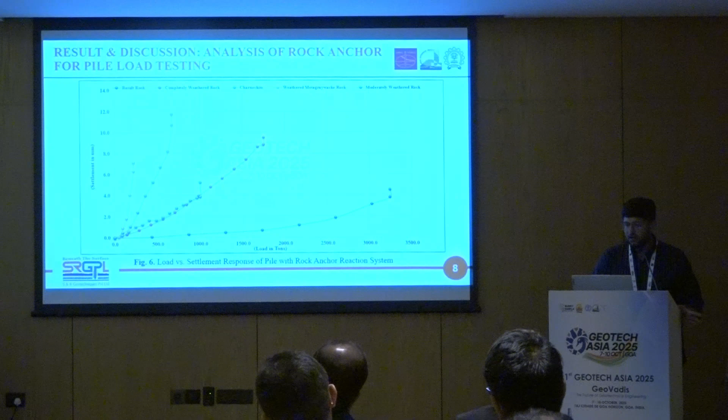Importantly, the study also documents satisfactory performance in weathered rock formations by adopting conservative empirical UCS approximations. The anchor also installed in fresh basalt type showed the highest performance due to the higher UCS and minimal weathering.

So now concluding, the reported field-based results of static pile testing up to 4050 ton reaction are among the highest published for rock anchor reactions. And afterwards, this research and documented case study also essentially supports the extent of fixed length, which could in turn promote the broader adaptation of rock anchors for load testing.

These are the references, and thank you.

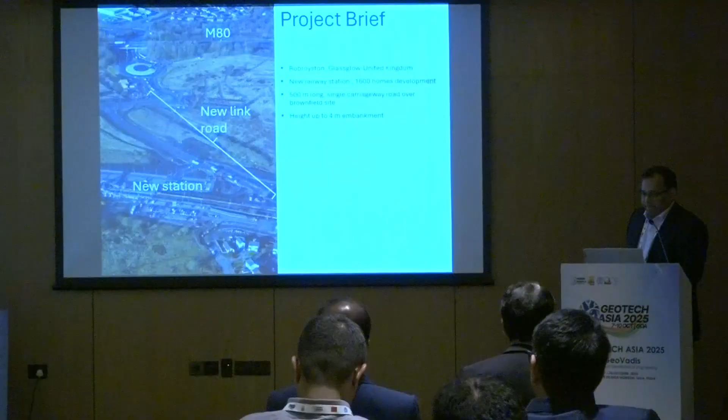Where are the papers? Can you help me with the papers? Where are the papers? I can't see the folder. Oh, I'm okay. Yeah, the last one. Yeah, okay.

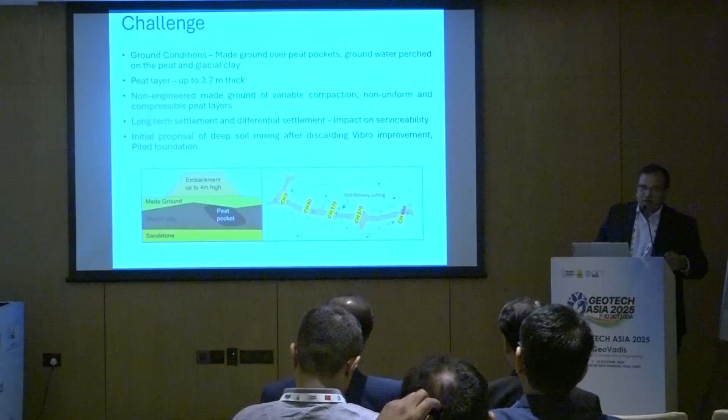The ground conditions were very variable. I tried to do a typical cross section — you can see made ground, glacial clay, followed by sandstone at a reasonable depth in relation to the embankment.

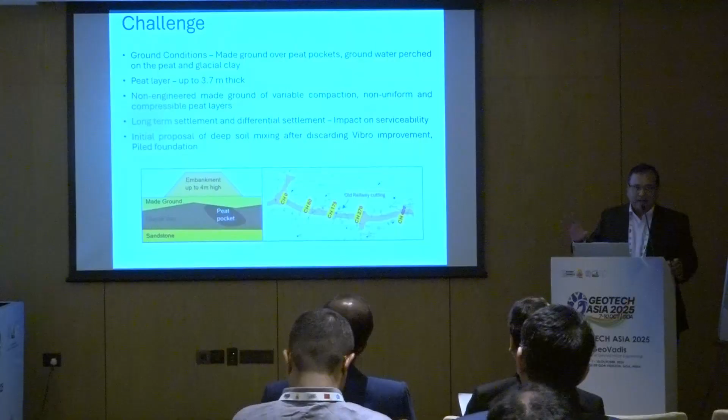The water conditions were almost in the made ground, or perched in the peat layers. The peat layers had moisture content of almost 600%. The thickness of the peat varies from 0, or as little as 0.7 meter, to 3.5 to 3.7 meters. This non-engineered made ground, with variable compaction, and the thickness and location of the peat layer, resulted in expected long-term settlement.

The long-term settlement may not be an issue, but the main culprit, or main issue, is differential settlement, which leads to issues with rideability quality. So serviceability was our main target in assessing the requirement.

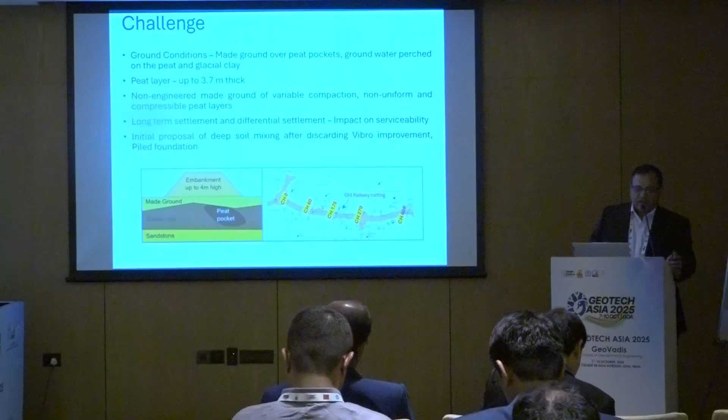So for the ground improvement requirement, the conventional technique was identified, and at the end the client or consulting engineer decided to go for deep soil mixing. However, the client, Glasgow City Council, had used this particular solution — what I call cellular mattress foundations — back in the 1990s, to support very soft silt and industrial waste over almost 850 meters length. That successful performance paved the way for this particular solution.

I'll take the opportunity to explain, because earlier that solution is what I call a cellular mattress, known as a geocell — but I'm not talking about this geocell, which is typically about 150 millimeters high. I'm talking about a cellular mattress. That's what a cellular mattress is — it is a continuous, open structure.

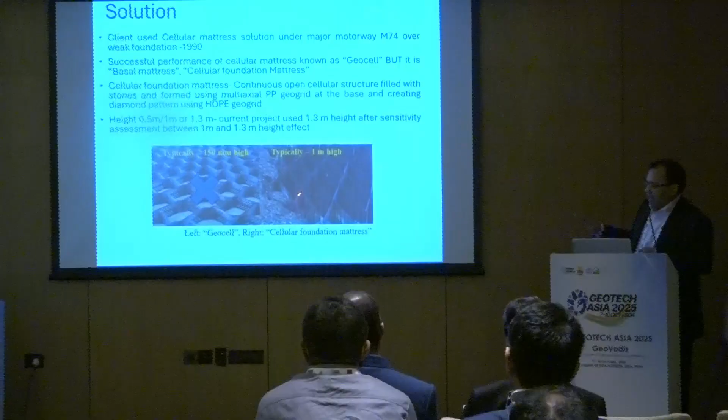What you see here is how we place a multi-axial grid at the base, then form it with highly oriented grids in a zigzag fashion — simply put, a diamond pattern — and fill with stones. Normally the height is between half a meter and 1 meter, but in this project we went up to 1.3 meters, and I'll explain what we did in terms of the work.

To assess the design and the bearing resistance and other parts, we utilized the British standards to assess using the slip line field for the bearing resistance. However, for the foundations and the settlements, everything, we had to use a 3D Plaxis assessment.

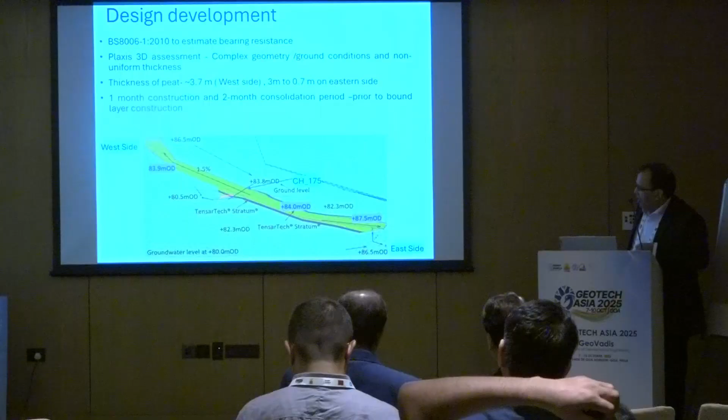What you see here is one particular element from the west side to east side, with different zones in terms of the ground conditions, where there's about 2 to 3 meters of embankment fill, and particularly the stratum or cellular mattress we did.

In terms of the assessment, the construction period was considered as one month, with a 2 month holding period prior to the bound layers being applied, meaning the asphalt layers. We performed a significant number of assessments, just showing one quick shot here.

Maximum settlement just after construction was in the range of about 310 millimeters at this particular chainage. For the same area, the post-construction settlement over 40 years is in the range of 300 millimeters. So we expect the total settlement will range about 650 millimeters.

We carried out a sensitivity assessment between a 1.3 meter high and 1 meter high cellular mattress. What you see here is one of the cross sections at the culvert sections, which shows that the 1.3 meter reduces the differential settlement by around 12%. However, the benefit we achieve is more than 20% in the slope of the settlement.

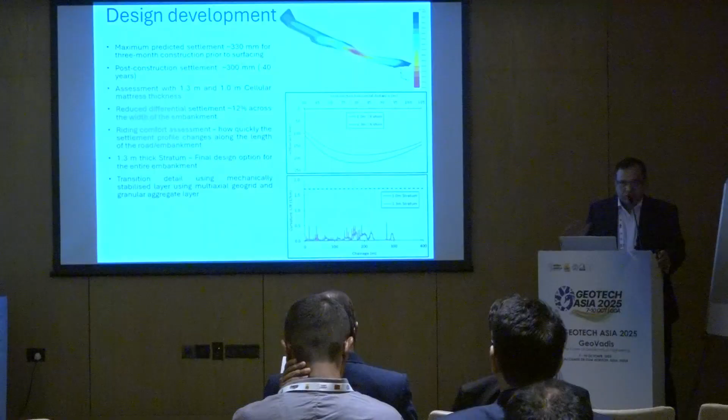The next step for us was to assess the riding quality. We carried out a kind of curvature assessment along the length of the sections, utilizing the concept of vertical accelerations, how it gives riding comfort to passengers, and found the target value of 1.7 in terms of kilometer range.

What you see here is a series of settlement curvatures along the length of the wall, and we found that the proposal was well within the target value limit. Considering all the assessments, we thought the 1 meter stratum or cellular mattress was okay. However, given the variability, we went for 1.3 meter.

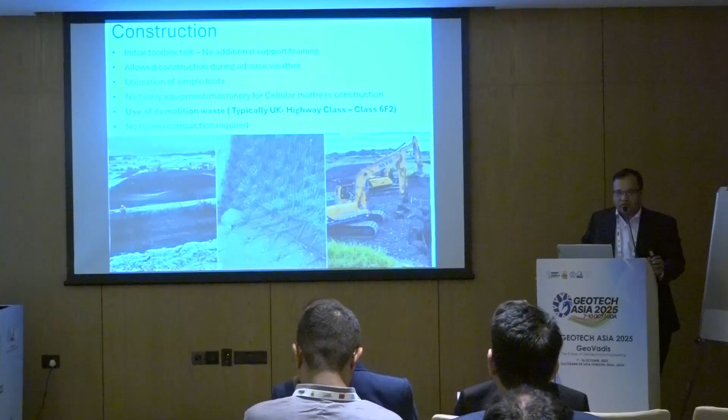So for the last 2 slides, I'm going to give you an idea about the construction and performance monitoring. In terms of construction, sometimes it looks very tricky. However, I'd say from experience, after a couple of days of construction, it's a simple construction. No specific skill or toolbox talks required, and it allowed work in really adverse weather.

What you can see here in Glasgow, we get snow conditions and everything, but we didn't stop the construction. It allowed utilizing simple tools, with no heavy compaction or heavy equipment required. One of the beauties of this is it allows fill material of demolition waste, resulting in a significant reduction in carbon footprint as well.

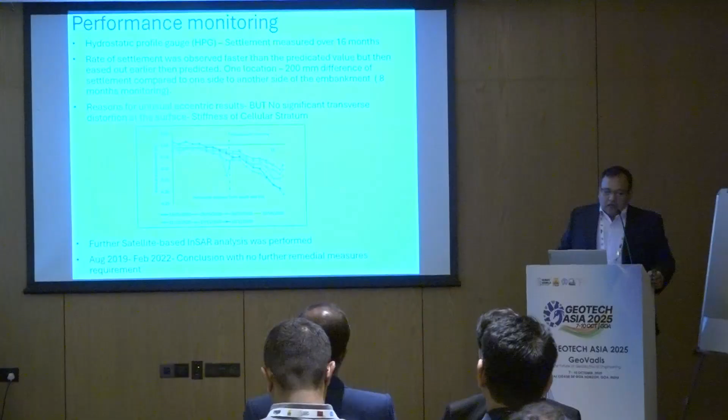In terms of performance monitoring, given the site conditions, the client wanted to ensure that if it settles significantly, we are ready with contingency measures. So we installed about 7 hydrostatic gauges and monitored the settlements. From experience, what we observed at this particular site was that the rate of settlement identified was faster.

But then what we used in our assessment also played out faster as well, so the total value is somewhere in line. However, at one particular location we found that settlement actually happened on one side of the embankment, not in the center. But thanks to the stiffness of the 1.3 meter mattress, that did not result in any significant distortion or additional cracking.

Kindly... however, the client wanted to do some more assessments in terms of monitoring. So after construction of the asphalt layer, we used InSAR, which is more a satellite-based monitoring. After two and a half years of settlement performance monitoring, the client was satisfied without any further remedial measures needed. So that's the concluding part.